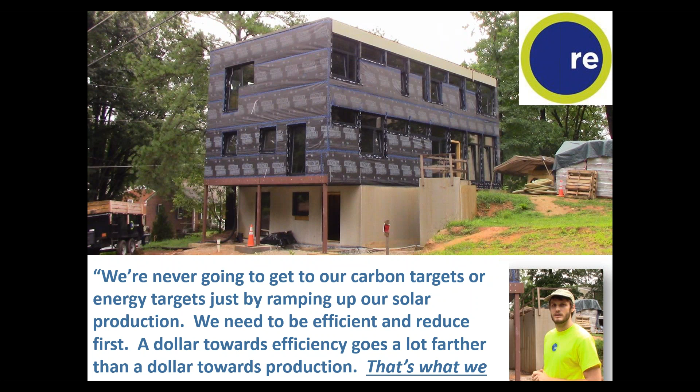Final mention is just a quick thank you to our participants, our panelists today, Steve, Kristina, KG, and Leah. They and others have been participating in our monthly Passivhaus committee meetings that we do. We've been doing this for probably about 1.5 years or so at this point, and every month we get a couple more people to participate and talk about a couple more fun things. They take place on the 2nd Tuesday of every month at 2 p.m. It's usually just an hour-long phone call. It is for members only, but we do invite guests to participate and kind of learn about what we're doing, and then hopefully encourage you to join the association. But again, that's up on our website under the directories. There's a committee for Passivhaus, and then there's also an events calendar, and you can find that information there.

So without further ado, I'll do a very quick introduction of each one of our panelists, and then we're going to kick it over to Steve, who is an NCBPA board member, to start the presentation. So we will have Steve Schreiner. He is with Schreiner Design out of the Lake Norman, Charlotte area, certified Passivhaus expert extraordinaire, and he will be talking about residential single-family projects, and so he'll be kind of getting us started with some background on Passivhaus for folks that are a little unfamiliar.

Next up will be Kristina. She is an architect over at OnSite Architects in Charlotte, and she works on lots of different types of buildings, and so generally speaking, we'll call that commercial today, and she'll have a case study that she'll be presenting. Also on deck is KG, as his friends call him, with BuildSmart out of Lawrence, Kansas.

He's got quite a bit of work here in North Carolina, and they are a product manufacturer with panelized wall systems, and he will be focusing on multifamily projects today. So thank you, KG, for joining us.

And last but not least, I have a typo. I'm so sorry, Leah. I will fix that right now.

Leah Dickens with Deltec Homes. Deltec is based in Asheville, North Carolina. Traditionally, they build those really cool, hyper energy efficient roundhouses that folks are familiar with, but Leah will be talking about some of their newer work with zero energy ready homes, and specifically how you can go from Passivhaus, mostly

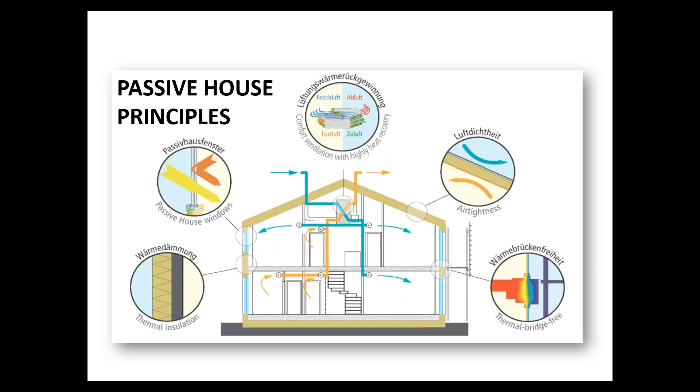Starting with the building envelope, I like to compare it to basically the leaky bucket syndrome, where think of you're trying to fill a bucket full of holes and you just continually have to keep the water flowing to basically equate to the water that's escaping. And that's about the same scenario if you think about it with a leaking building envelope.

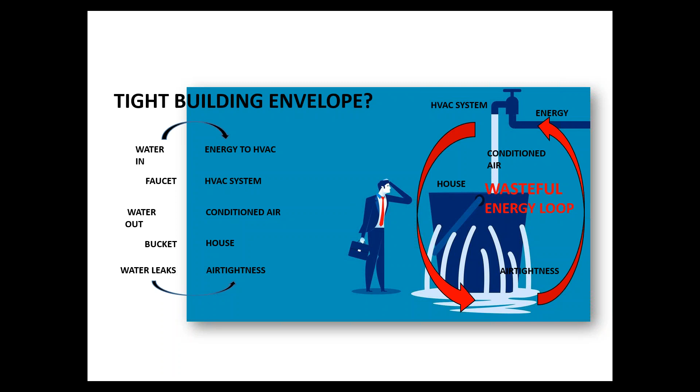What would normally happen in a conventional construction, you have infiltration, exfiltration, and that air needs to be continually reconditioned, which takes energy to do that. And that's the wasteful energy loop I show in that cartoon.

I borrowed these slides off of Megan McDermott with High Performance Building Solutions, and she shows here in a chart 4 building programs, starting with 2018 International Energy Conservation Code. They have a 5 air change per hour at 50 pascals air tightness requirement.

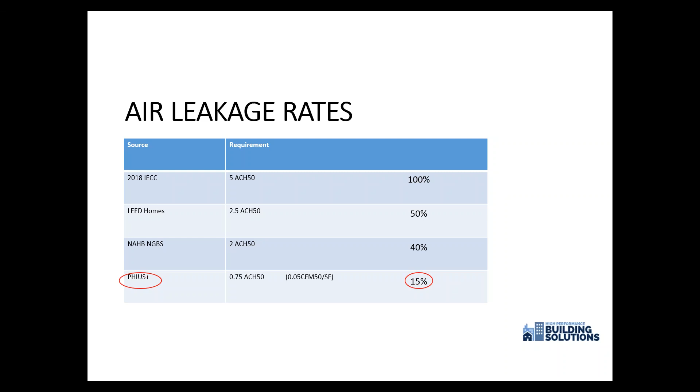You see LEED for homes, the NAHB's National Green Building Standard, and then at the bottom, PHIUS, or Passive House Institute US, and they have a 0.75 air changes per hour, and that is a 0 before the decimal point. And so that's showing only a 15% leakage rate compared to the IECC.

This is a printout that I did of an optimization software that I use called BEopt, National Renewable Energy Labs. And it's a software that allows you to compare different building assemblies and the components and different combinations of them to find the most energy savings, which would be the x-axis in this graph, as compared to energy costs, which would be the y-axis.

So what I'm showing here is an optimization curve, and anything on those curves are the most optimized or cost-efficient and high-performing combinations of building components. The red I'm showing you, as you tighten up a building envelope, it gets much more energy efficient. And basically for every 2 air changes per hour that you tighten up, you're going to see somewhere between an 8 and a 10% increase in energy savings.

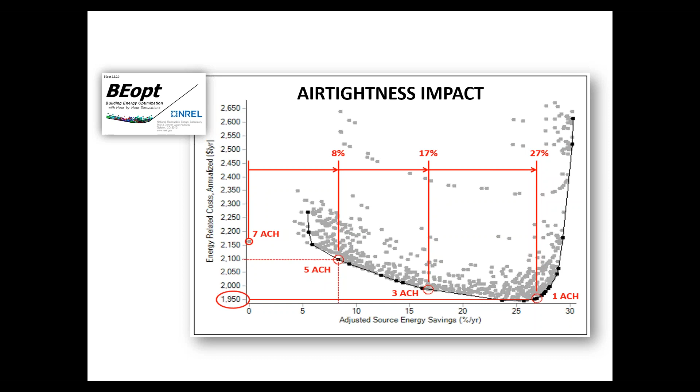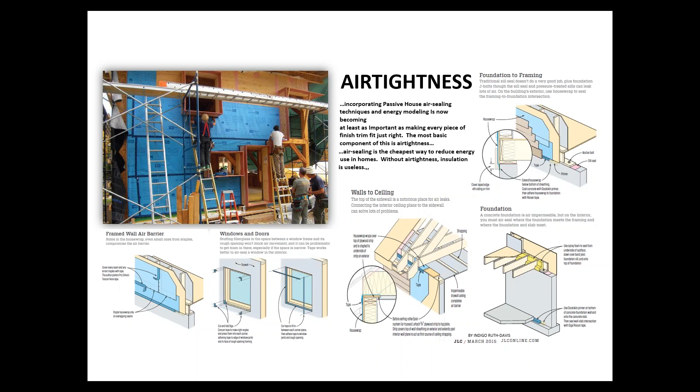Of course, there's all kinds of ways of addressing air tightness in the building envelope: your house wrap and taping that, your window installation and how well you seal that in the rough openings, raised heel trusses to allow you better sealing and insulation possibilities at the upper wall and roof juncture, and of course sealing and insulating the rim joists, as well as using different materials and methods of air sealing.

There are pre-manufactured sheathing systems that have air and water resistant barrier already applied, coatings applied to the outside of the sheathing, and in some cases there are some insulating characteristics of that sheathing, providing you an R sheathing, if you will. There are fluid applied applications as well. Usually that's more towards a multifamily or commercial type setting, and there's an airborne chemical that is sprayed under pressure inside the building envelope, looking for cracks and crevices that air is trying to escape from the inside to the out.

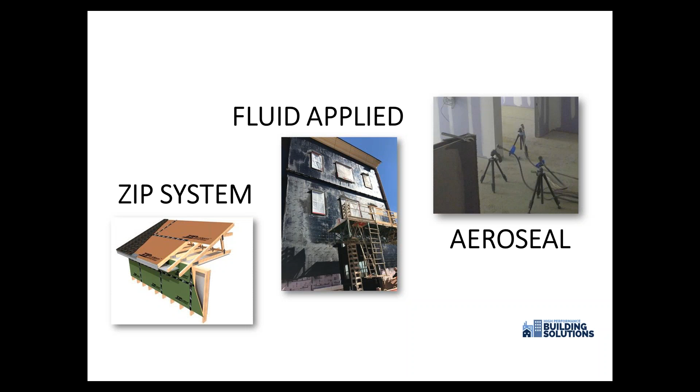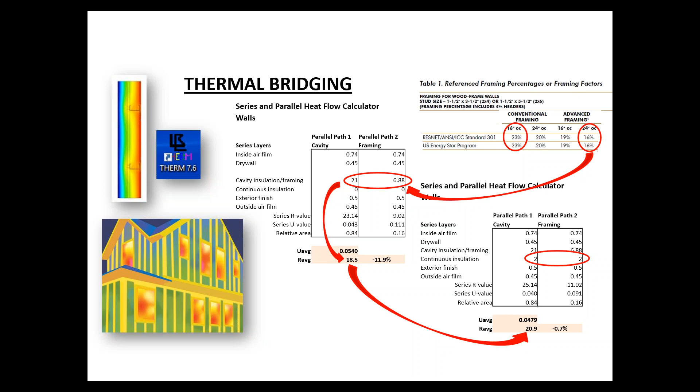It's really an 18.5, or a 12% decrease, because of the thermal bridging by the wood studs. The right lower corner shows that same table, but if I add about a ½ inch of EPS to the outside as continuous exterior insulation, I'm able to break that thermal bridge provided by the wood studs, and it gets me back up to a full wall rating of 21. So again, it's a little bit of a trade-off back and forth of how you can handle thermal bridging.

and it gets the entire T-stud up to an R20 rating, which, if you remember the previous slide, we were at R21 fiberglass cavity. This is going to get the stud to equal the cavity. Well, this may be another way to break that thermal bridging situation without having to do the exterior continuous insulation. So again, this is to some of the flexibility the Passivhaus program has.

Okay, this table I wanted to point out, again, another example of thermal bridging, and this is one that really even surprised me. As I mentioned earlier, the thermal envelope also includes a bottom. In this case, it's the slab. And the circle in the middle, those two assemblies are exactly the same except for one very important fact, and that is one has 2 inches of foam under the slab, the other does not.

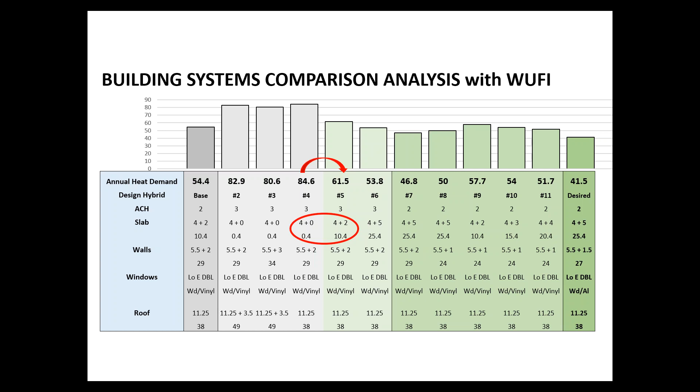If you look at the annual heating demand above, you're going to see a 23-point difference. That is huge. So even here in Charlotte, in a relatively mild climate, the slab to earth connection still provides a pretty good thermal bridge that you might want to consider.

As I had mentioned about windows earlier having to do their fair share, I borrowed this slide off of Alan Ockoff with Andersen Windows. The Lawrence Berkeley National Labs, together with Andersen Windows and Alpen High Performance Systems, is doing research to develop a triple pane window that will have the characteristics of a double pane window with regards to width and weight. The trouble with triple pane windows normally is they're usually wider frames and they are much heavier, which makes it a little more challenging to incorporate in conventional building systems.

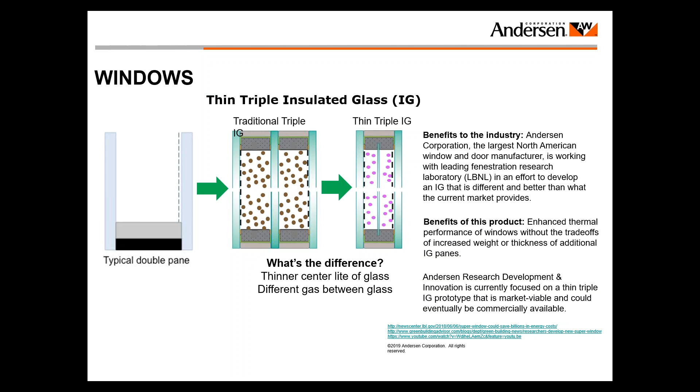So what they're doing is using a flat screen TV glass, which is extremely thin and thereby very light as well. They're going to come up with a triple pane window that will be basically the same width of a double pane and weigh just about the same as well. This is in research, and they're hoping to have it to production in the next 2 years. And this would be an extremely important game changer for Passivhaus.

Okay, let's turn to the inside and the mechanicals. This cartoon cracks me up. It's probably the best description of Passivhaus that I know. The far left, a couple hundred years ago, we started building structures for ourselves for comfort and safety, and we added fireboxes inside for a little bit of additional comfort. The middle sketch shows we thought we'd get smart in the 20th century and start adding a bunch of mechanicals, maybe improving the outer structure, okay, but maybe not as much as we should. But all those mechanicals take energy to run them.

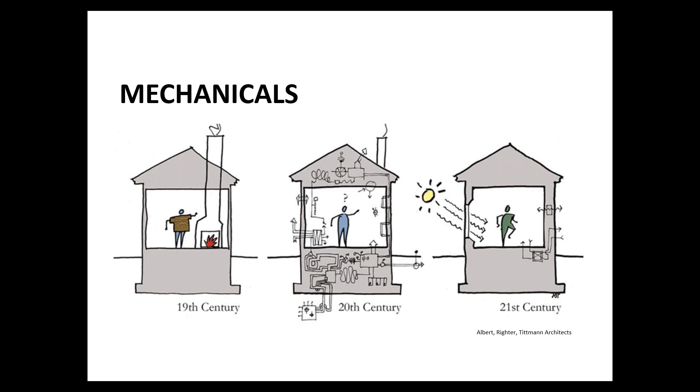The one on the far right is basically what Passivhaus does. We look at the structure and the envelope first and foremost to get it to the optimum performance, if you will, and then we supplement it with a minute amount of mechanicals inside, thereby greatly decreasing the amount of energy to run it all.

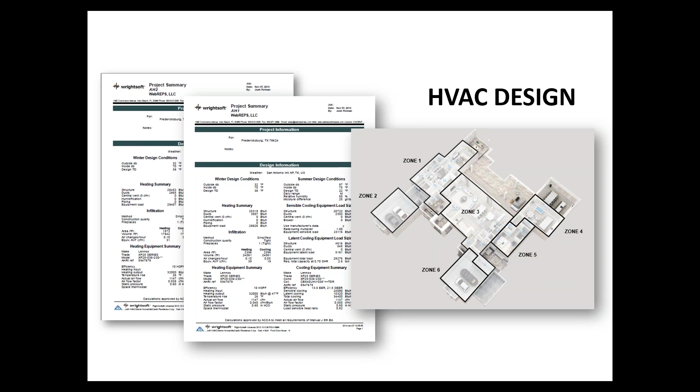Of course, as you tighten things up, you have to be very careful with the HVAC design, and that's when we have to implement the ACCA Manual J, S and D, to make sure everything is sized properly and will perform. What we have to be very careful with in these airtight buildings is not only the sensible loads, but even more so the latent loads that normal construction doesn't have to worry about. But that's something that we take a good hard look at in Passivhaus design.

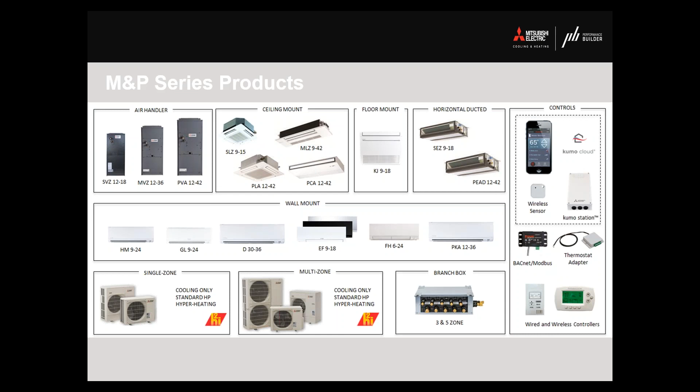I borrowed a series of slides from Rob Howard over at Mitsubishi. This is to show you a myriad of products they have that will address the tight building envelope environment that a Passivhaus will cause. These are showing air source heat pumps, both ducted and ductless mini splits. I will tell you that as we get tighter, using combustibles, for instance gas heating furnaces and gas water heaters, is probably not a really good idea because of backdrafting. So the heat pump and electric heat pump related products shown in this slide are probably the way to go.

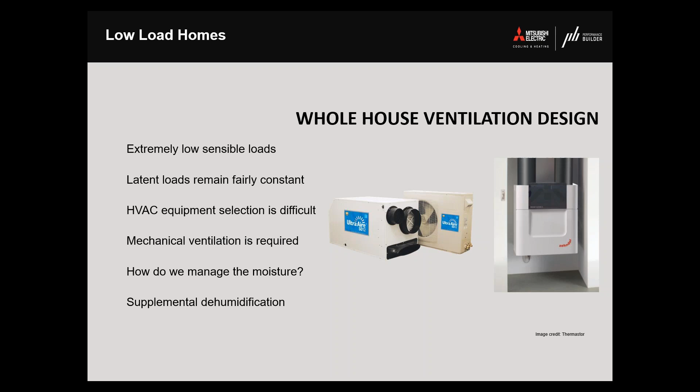As I mentioned earlier too, ventilation becomes very important. We do not have the easy airflow of a drafty conventional construction. We have controlled import and export air. We want to make sure that the new fresh air we're bringing in is pre-treated with the energy of the already conditioned air being exhausted. It is a dedicated system that supplies air to the bedrooms and living areas and exhausts air from the wet areas and odor areas such as kitchens and bathrooms. And I'm showing in the photograph here a couple of ERVs, or energy recovery ventilators, that are used for that process.

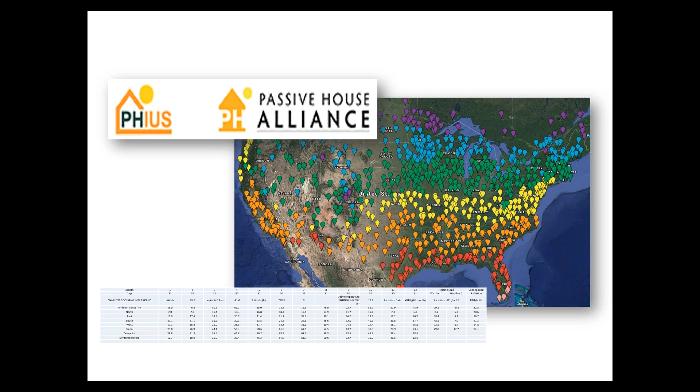What I like about the PHIUS Passive House program is that it is not a one-size-fits-all program. It is very site-specific and climate-specific. Each of the balloons shown on that map of North America shows the locations that PHIUS has analyzed using WUFI and BEopt to get an output of targets that are optimized for the location and the climate at that location. The chart in the lower portion of that slide shows the climate data that would be inputted into the WUFI energy model together with your building assemblies to give you a very effective output for your different heating and cooling demands.

As with any process, there is a right time to do things. I would advise that the analysis part be taken into account during conceptual design before you get to construction documents. With the different scenarios that I presented to you earlier in the presentation, what you would do is enter those different assemblies and components into the WUFI and BEopt software to help you make decisions on what best works for your building systems or your particular design and the targets that you're trying to satisfy.

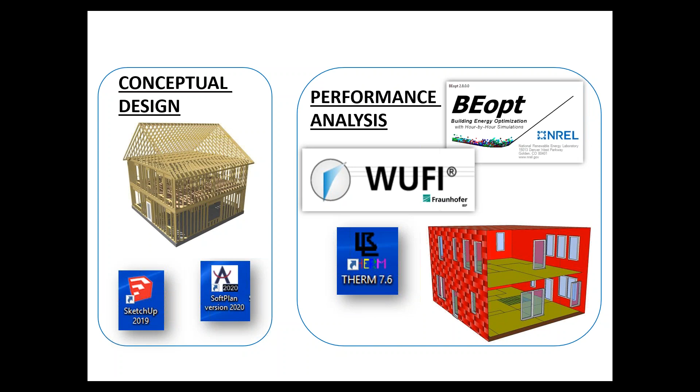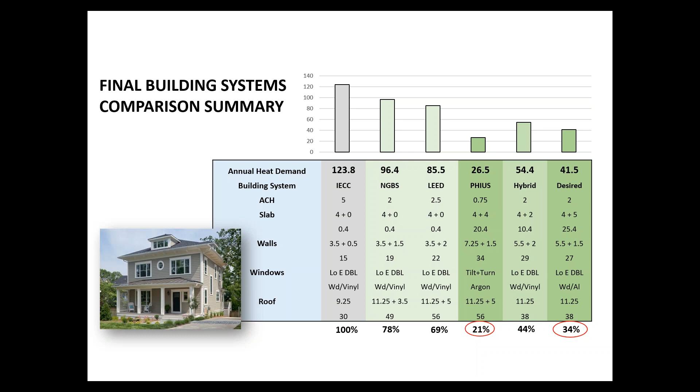One last chart. This is showing four building programs and how they perform against each other depending on the building components that they're specifying, all the way from IECC, Green Building Standard, LEED, PHIUS. What I've done on the far right is come up with a design hybrid that I use as a kind of test case. It's 2 air changes per hour, 2x6 studs, an R27 wall assembly. And it does have foam under the slab for about R25 and an R38 ceiling. And you can see that it will produce a heating demand that's 34% of what the IECC components would. So again, this is an example of what the Passive House program can do to make a building really sing. And you can see the PHIUS column in the middle there. They're 13 percentage points below me even.

Recently, there have been articles about this program in Builder Magazine, which is the NAHB's publication. You might want to check that out. I think it was the January issue that they had the article in.

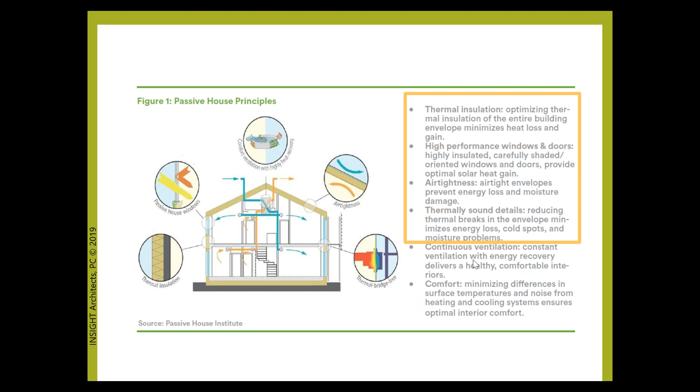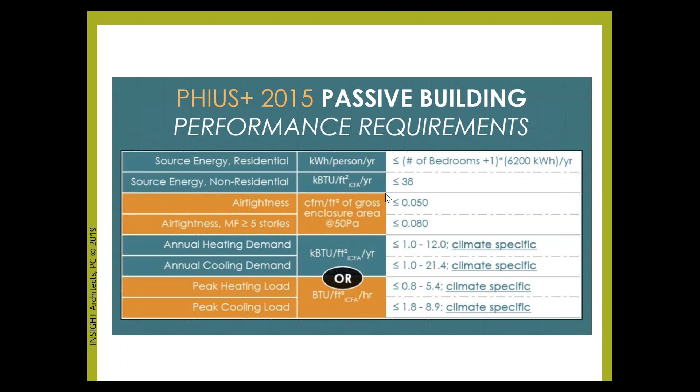Here are some other prescriptive requirements, and the one for pre-certification and on-site verification is something I appreciate most for Passivhaus. Pre-certification gives you a chance to have a peer review with PHIUS, and they will point out any troublesome spots and areas in your envelope. Once this passes and you correct any issues you might have had, and the building actually is under construction, you will get on-site verification, and you will get one for foundations, when the building air envelope is on with the windows to test for air tightness before the facade is on, so you can still regulate and correct mistakes. And then one is the final test for air tightness. So it's completely performance based.

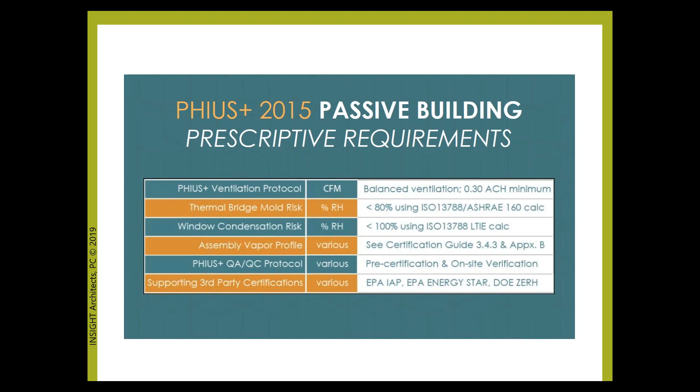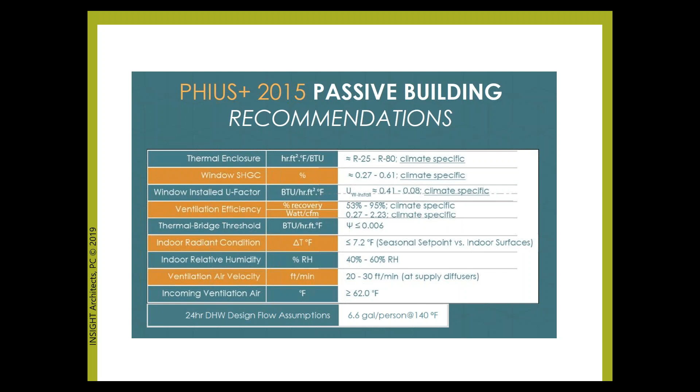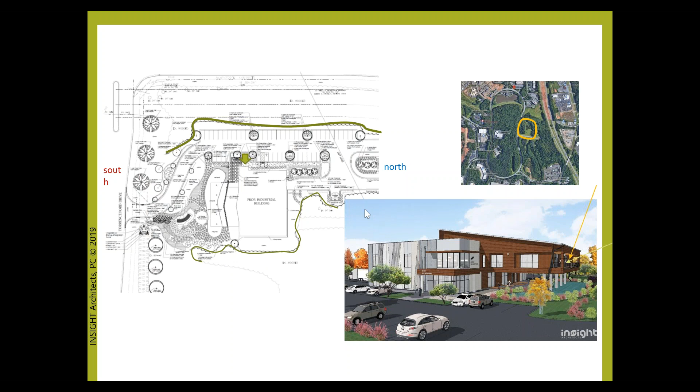Also, this is the industrial part, and this is the office part. So they are separated mechanically into zones. The industrial part has its own mechanical system, and the office portion is divided into zones with VAV boxes. The industrial portion of the building has a different construction type, so the bearing exterior walls are actually insulated precast panels, whereas the upper story and the first floor of the office are steel construction with rain screen.

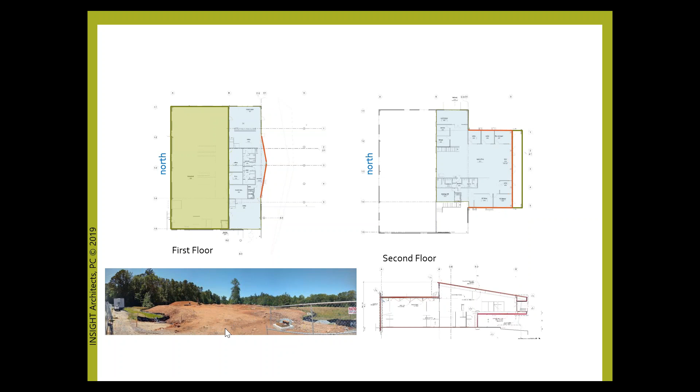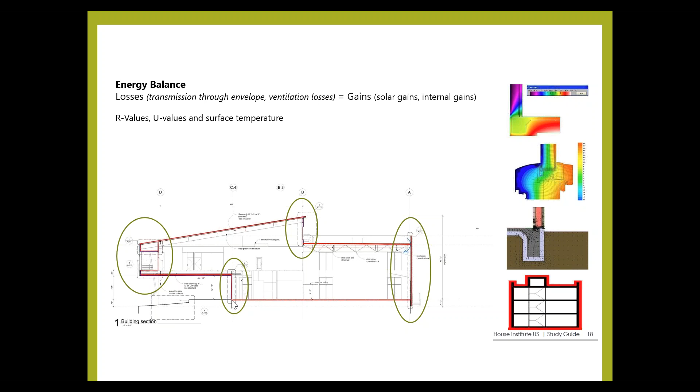So here we have underslab insulation, and that connects with our continuous insulation in the precast panels, connects with continuous rigid insulation in the roof, and then connects with cavity and continuous insulation in our wall system. Again, it goes around the penetrations of the structure through the envelope, out and around, and connects again to the footing. So I'll try to show that a little bit better in larger details.

So this is our south-facing second-story porch. And since we have steel penetrating the exterior envelope, what we did is we actually ran the thermal insulation all around it. In Europe, you can actually make connections that are thermally broken steel to steel, but we don't have them here yet in the United States. So this is what we did. We had to run it all the way through. We were going to do it as well in the bottom part, but for some reasons we have not.

So the door actually sits on a piece of rigid insulation that then connects to the insulation below deck. So we have a small thermal bridge right here where the steel beam actually disconnects our batting and rigid insulation. But otherwise, we have a continuous air barrier, which is very important for us in the south, so we don't lose any energy in the summer months when we are air conditioning the building.

So then the next detail is the footing and the wall, and you have continuous underslab insulation, around the footing and up into continuous insulation. So we have a rain screen on the office part, which means that our cladding allows for water and wind to reach the weather barrier.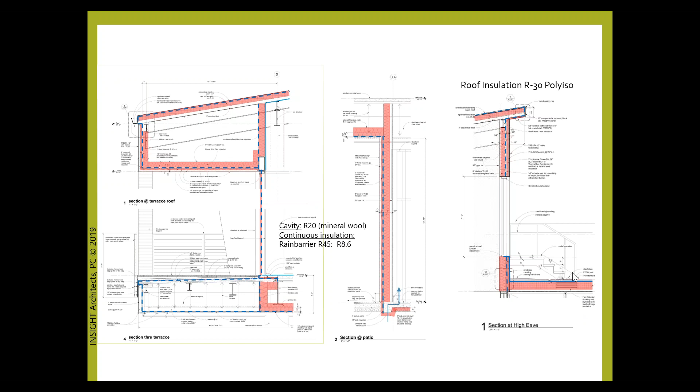So here we have an exterior stair, which allows us to access the roof. So we don't have a roof hatch. We have actually a storefront with a door where you can more easily walk out on the roof for maintenance. And what we did is actually set the stair on top of the water barrier and the thermal insulation, not to have any thermal bridge here. So I thought that was an interesting detail to show, and just to sort of explain the thinking behind these types of buildings.

And then here, as another interesting thing we found, is the energy guard. Because we have a dock door here, it's an industrial building. They leak air terribly. And first, the idea was not to condition the industrial part, but since the work that is being performed is more programming than manufacturing, really, the comfort level of the workers was really important.

So for one, what we did is we sliced the building with a storefront. So while you're at the factory, you can have views to the outside and you can have a lot of daylight. Daylight studies show that you don't have to even turn on the light on a nice and sunny day. So at the dock door, we would have a lot of air leakage here. So what we did is we used the energy guard, so when it's closed, you don't have any air leakage through the dock door.

Here is the precast panel with the 2-inch continuous rigid insulation. So from the PHIUS Institute, they have done studies that thermal mass in combination with the continuous insulation will jack up the R value of this continuous insulation by 2. So this wall as well has about a 28 R value. So has every wall. Here we have another continuous insulation on the factory with EIFS, which is a self-draining EIFS system. So it will prevent any thermal bridging from the metal studs in the wall. And then again, mineral wool in between the studs.

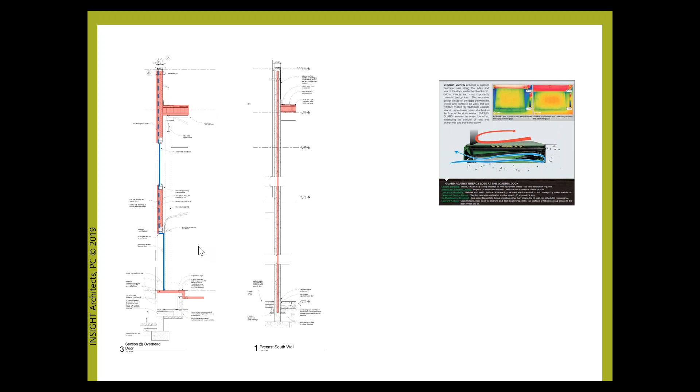Then we come to the windows. And one type of window we really like to use in passive house is the tilt and turn. And this is because, well, it looks nice and we are used to using it in Europe, but also because it actually air seals the window much better than a double hung, because it applies pressure on the gasket and no air can pass through. Another thing that we usually do is provide these windows for ventilation almost solely, and the rest of the window is fixed. This reduces cost and also improves air leakage and also R value for the window.

So here on the west side, what we did is we pushed the window in a little bit in a rhythm, so you can get some shading from the wall as well. And here is a typical passive window that is even 4-layered, which is really a lot. Here for our climate, a 2-layered window is just enough if we have the right solar heat gain coefficient and U value. So here is the chart.

That's the PHIUS chart, the recommendations, and then you still have to do your energy model to see if everything pans out and to find the sweet spot on how much money you're going to invest in the envelope and windows and how much energy you're going to save. And at one point, adding more R value to the envelope really doesn't give you anything, so just to see where that trade-off is.

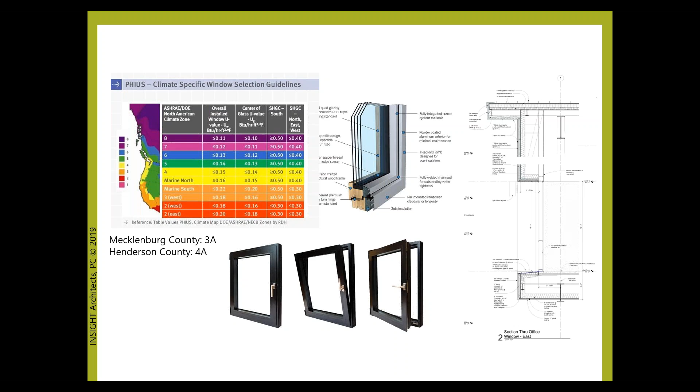So it's very commonly available materials. And then exterior gypsum sheathing for our exterior air barrier, and basically gypsum was our interior air barrier.

So here's another project where we went a little bit more extravagant, if you want. So we actually have a rain screen that is attached to a 2-inch wood fiber board. This wood fiber board is called Gutex, and it's a new product. It's made out of wood chips, really, that are then infused into paraffin. So it serves as an air barrier and as a weather barrier. It overlaps with the tongue and groove, so nothing can get through it, but yet it breathes.

So we have 2 inches of this. This is in a different climate, 4A, up in Asheville. So we have a better R value for this wall. It's still metal studs, and we use an interior membrane, which is called Intello. And what this intelligent membrane does is it can open up in the direction of vapor travel.

So in winter, when we have a lot of heat in the house and we accumulate a lot of moisture, the moisture wants to escape. So the membrane actually closes and doesn't let the moisture go into the wall, where it could potentially condensate and create mold. And in the summer, when we have a high humidity on the outside, the moisture will actually pass through and you can dry it out from the inside, which is what you want.

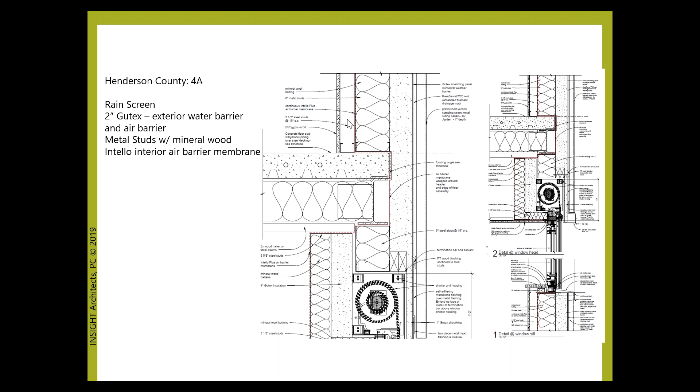You know, when you hang a picture in the wall and your chipboard is the only interior air barrier, what happens is really you create air leakage through electrical outlets, through pictures hung on the wall, and so on. So here you actually create an electrical chase that doesn't allow for this continuous air barrier to ever be broken.

Hey, Kristina, it's Ryan. We're getting some background noise. Is that from your side? Yeah, let me. All right, folks, I think Kristina's probably running to another room, maybe. Sorry about the background noise there. I'll give her just a minute. Hello, Ryan, can you hear me? I'm back. Is it better now? Yes, thank you, Kristina. Yes, we have an open office, so everything is just acoustically not separated.

But here's the Intello membrane. This is what it looks like. It's really easy to apply. And this is the interior air barrier you see, and then the Mento air barrier on the exterior of the building. Taping around this connection between the window and the air barrier is also very important, and taping in between the sheets. There's also some overlap in them, and they're just installed in a very specific way.

So what is the difference between the two? The Mento membranes and Intello membranes actually work on a molecular level versus on microperforations. So the microperforated membranes, once they tear, they actually don't work that well anymore. These are much stronger, and they don't allow any air to pass through, just vapor, which is exactly what you want.

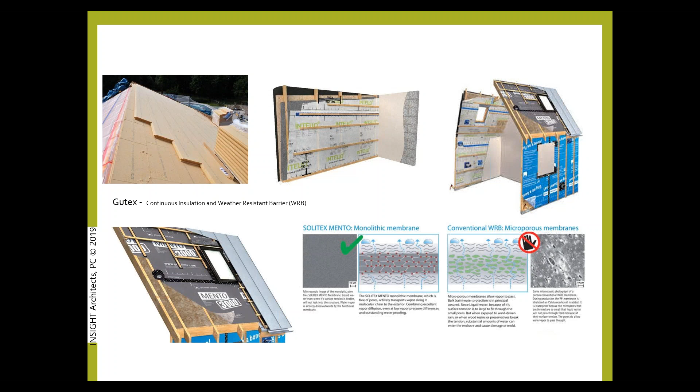They're also a little bit expensive, but on a project that was, for example, $1.8 million, all of the membranes turned out to be $40,000 just as a wrapper. I think it would be totally worth it to completely seal your building for that percentage of a project cost. And here's another one.

Sorry. So why is it important to certify with Passivhaus? It is great to use all the principles and just be mindful of how you build the building and build a more high quality building. But when you actually go for certification, it isn't that much more expensive, but you get a lot of benefit for it. You get team commitment and client commitment. With pre-certification, you get the peer review of your drawings. So you actually send in your drawings and you can learn from them.

You can make them better and almost perfect. Then when you go into the energy modeling, you can actually fine-tune all of these things and balance cost versus what you're actually getting with making this super insulated structure.

You get field inspections with it. So they look at how you are actually insulating under the slab. You get another field inspection to see how you air sealed your building, where you can check for leaks and correct them. And then in the end, you do the final blower door test where you actually show that your building meets the Passivhaus airtightness standards.

So I really like this system because it's very straightforward. It gives you enormous flexibility with the type of building materials you're going to use, the technology you're going to use. So you can go very basic and buy all of your materials from Lowe's, or you can go high-tech and use high-tech membranes and high-tech heating and cooling equipment. And you can do anything in between. So it's a very simple and applicable, practical way of building, and it's very resilient against power outage, and the thermal envelope lasts much longer, and that's something you'll have for the longevity of the building.

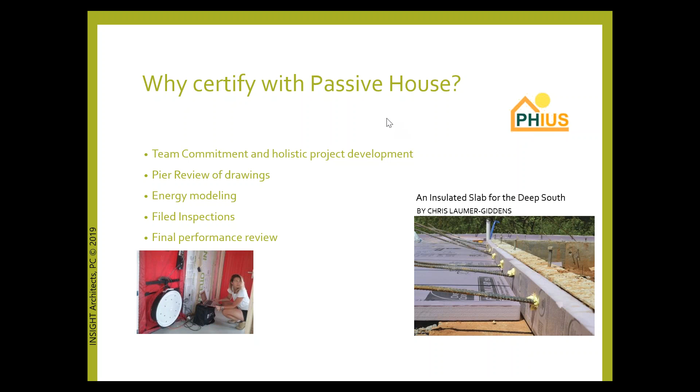My name is Karan Gupta, or KG for short. I'm a project manager at BuildSmart, and we're a manufacturer of high-performance panelized wall systems based in Lawrence, Kansas. Today, I'm going to be discussing panelized passive house systems for new multifamily construction. I have adapted this presentation from my colleague, Paul Grahovac, who has a compelling financial analysis paper to complement it.

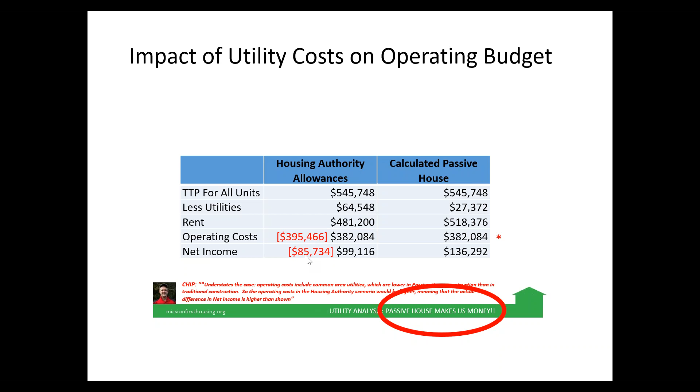So what's shown in black here is they put in the same operating cost for what it actually was, but if you were to properly value the operating cost for the common areas, it would actually be higher, and therefore the net income would have been less for a code built.

So the increased net income for the passive house building increases the developer's borrowing capacity by $300,000, and the increased mortgage amount translates directly to a higher net fee for the developer. Because the developer for this project is a nonprofit, they can plow the increased fees directly back into building more affordable housing.

So the Whitehall project in the case study we just looked at was affordable housing. But how do the numbers compare when you're looking at market rate housing? Well, Paul undertook the task of a financial analysis for the same building if it were built to code in Kansas City and if it were built to passive house without any subsidies. As you'll see in a moment, the results are promising, but when comparing new passive house construction to legacy housing stock rather than to new construction to 2012 code, the numbers are even better.

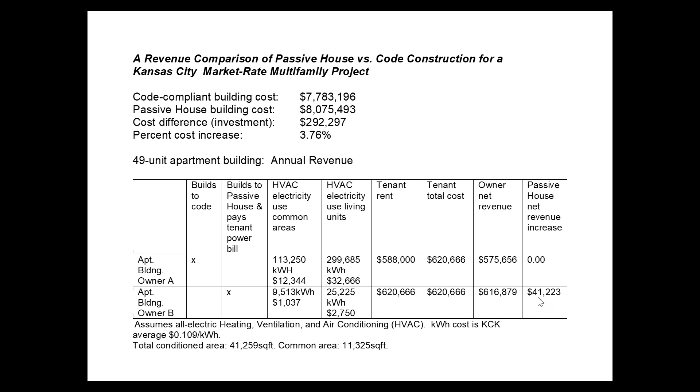So in the chart shown here, owner A owns a building just like the Whitehall in Kansas City, built to the 2012 code. Owner B owns a similar building, but this one would be built to passive house in Kansas City. You can see there's a 3.76 cost premium for the passive house building. Owner A pays the utility bills for the common areas, and the tenants pay utilities for the living units, whereas owner B charges tenant utility allowance and pays all the utilities. And you can see a net revenue increase of $41,223 for owner B.

I know there's a lot of numbers there. I'll try to walk you through them slowly. Don't worry about the numbers down to the single dollar digit numbers. But let me just walk you through this table. In the base case, the net annual cash flow is the difference between the additional revenue from the energy savings and the additional cost of the mortgage payment attributable to passive house construction.

With this net annual cash flow, it would take 10 years and 9 months to achieve payback on the cost premium. But as we work across this table to the right and factor in additional savings from passive house and panelized construction, you'll see the payback start to drop. The first thing we can look at is first cost savings on the HVAC capital expense due to reduced loads for passive house building. After that, you can add in fixed windows with lower maintenance costs and failure risk. So that's basically changing some of the operable windows to fixed.

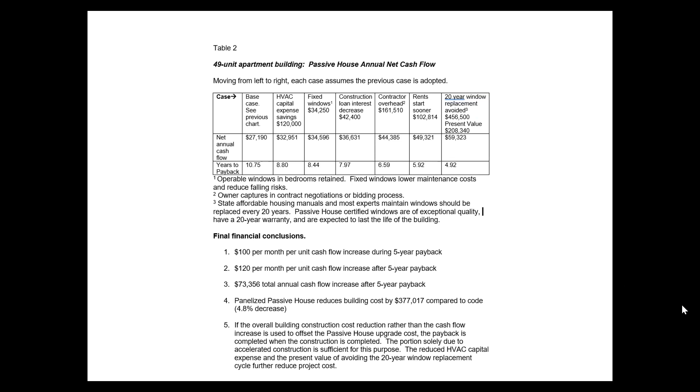The uptake in passive house construction for affordable housing in Pennsylvania supports the conclusions of our case study and financial analyses. And I tried to keep this short, so that gets us to the conclusion.

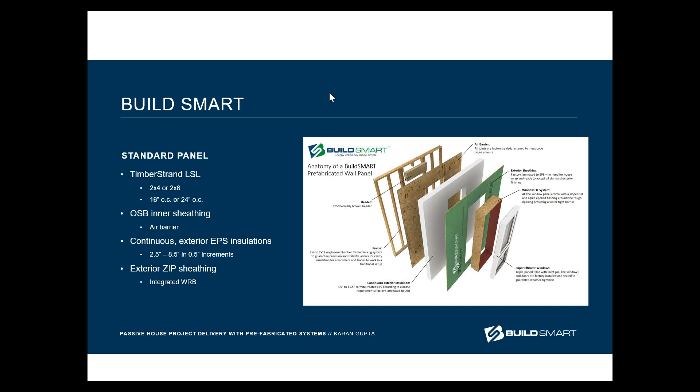All right, so we are going to jump ahead to our last presenter, and the reason she is last is that she can take our homes and buildings down to net zero energy very easily, cost effectively, and whatnot. So Leah, I jest a little bit because I know it's not that simple, but do you want to tell us how to do it for the real world?

Sure. So, hey guys, I am Leah Dickens. I'm the Green Building Manager with Deltec Homes. We are actually sort of like BuildSmart in that we are also a panelized company. Our manufacturing plant is in Asheville, North Carolina, but we focus on single-family residential construction. And so we build our home kits in Asheville and ship them all over the world for people to erect with a builder on site, and we have our own builder in Asheville as well.

And so I work as a building science consultant for our builder, other builders, and for our clients on green building. And we recently built one of our homes to the DOE Zero Energy Ready Home program. So this is not Passive House. I'm actually here to talk about not Passive House. But I wanted to talk about how some of the aspects of this program that maybe look at energy use a little bit differently could be beneficial to a Passive House project. All right, let's go to the next slide.

So a quick overview of this program. It's another third-party certification program. This one is put on by the Department of Energy. And surprise, if you're doing the PHIUS standard, it's a co-requisite, so you should know about it, because you've got to do it as well if you do the Passive House US version of the program. It's the next step above Energy Star, which is another well-known green building program as far as performance. So its target performance level is in the mid to low 50s HERS score, which is certainly respectable performance.

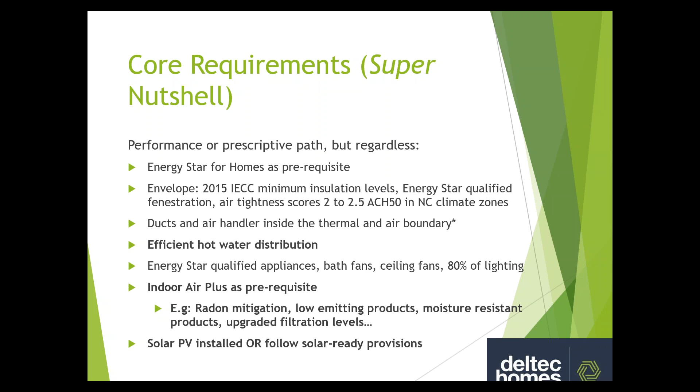And in addition, you've got to either have solar PV or follow a solar ready checklist if the home has enough solar energy to justify, or solar access, like it's not shaded, it's got enough solar energy available.

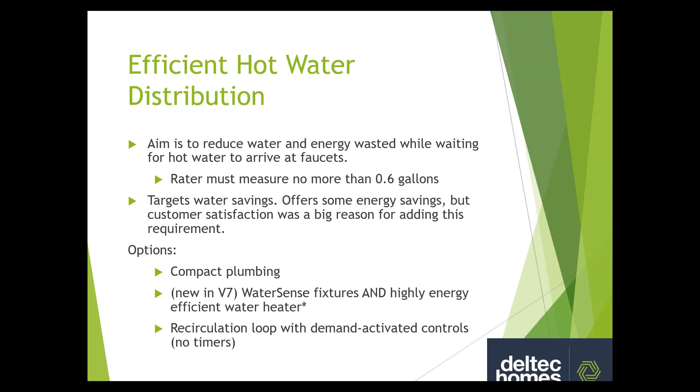So the ways that you can meet this requirement: you can limit the piping distance between the water heater and all the fixtures that use hot water using compact plumbing or a central manifold kind of system. In the newest version of this program, you can also meet this requirement by having WaterSense fixtures at every faucet, plus a very efficient water heater, and there's still some caveats to making that work. Or you can use a hot water recirculation loop with demand activated controls to ensure the energy savings, and that's actually what we did on our project.

What that is, it's basically a typical trunk and branch plumbing system, but it's adding a return loop to bring water back to the water heater. And so you have small branches off of that loop to each fixture. And that pump is what's kind of controlling it. So it's basically bringing the cooled water back to the water heater to get reused instead of having it sent down the drain. The pump basically runs until the water's hot enough and then it shuts off.

So when you're doing this, the way to save energy is to use demand activated controls for the pump. For the Zero Energy Ready Home program, that's got to either be a button that the homeowner activates when they want hot water or an occupancy sensor. And there are some pumps that have adaptive control systems that learn the homeowner's behaviors, and those are okay too. What it can't be is a timer, and that's kind of commonly how these systems are set up.

And I've actually even heard horror stories about how they don't think about controls and they're not controlled at all and they just run all the time. And those systems, they find, end up wasting energy rather than saving it because they come on when the homeowner doesn't actually need them. So the DOE says it's got to be demand activated for this program.

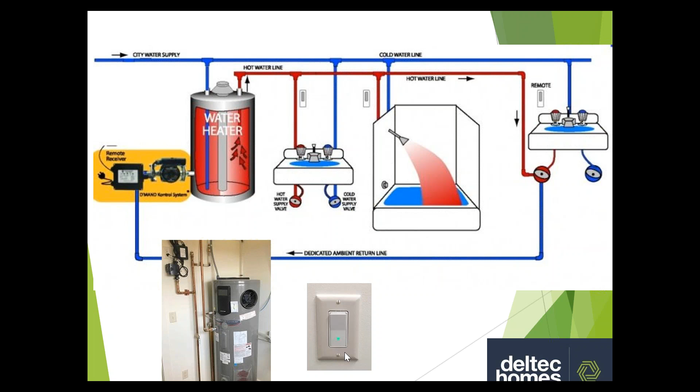So to meet the zero energy ready part of this, one way to do it is to just have solar as part of the project, which is what we did in our example. We had a grid-tied solar array. We used the HERS score to help figure out the size for the home. Basically, we were looking to be in the 0 to 10 HERS range, and we ended up at 0.

In North Carolina, solar is pretty easy to do. If you're on Duke Energy, they do have a one-to-one net metering program where they basically buy back the excess production at the same rate as retail, and then clients can credit that against their future energy use. If you're on an electric cooperative, the story is more mixed. You just kind of have to look into it and see what their programs are. And my real advice is just to have an experienced residential solar contractor work with you on it. There's a lot of them in North Carolina, and it's actually pretty simple.

But if you're not going to do solar as part of the project, but you have enough south-facing roof space for solar that's not shaded, then you do have to do the solar ready checklist for this program. And what that requires is some basic stuff to give to the homeowner to make solar easy. And I think that makes lots of sense for a passive house. So you've got to provide drawings to the homeowner that show them where the solar array is going to go, basically how big it's going to be. And they advise that you can go ahead and put blocking in, if you need to, for the roof or for the inverter to fit the solar panels.

To go ahead and provide structural information that verifies that the roof can support solar. Commonly, when you go to do solar on a retrofit and you get a building permit for it, one thing they ask for is, structurally will it do it? So giving the client that information is helpful. You've got to go ahead and install and label the conduit between the solar array and the inverter, where those things are going to be, and then between the inverter and the electrical panel. And you've got to provide the breaker or the labeled slot for the breaker, a 70 amp dual pole breaker for solar.

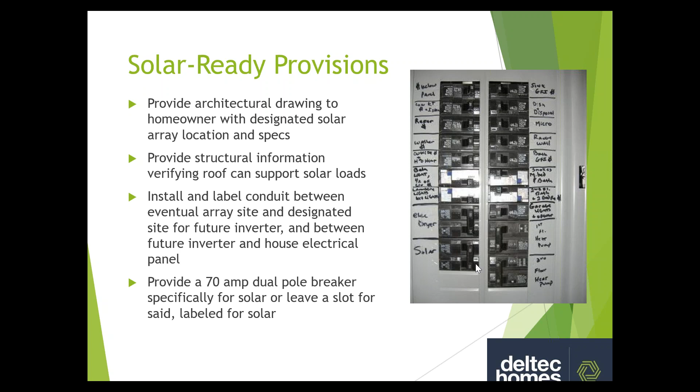All right. So just continuing with this theme of ways to reduce energy that are not necessarily the same concept as passive house. Zero energy ready home doesn't require whole house electrification, but there are a lot of electric appliances that can use a lot less energy, so they're worth looking at. In this project, we actually used a heat pump dryer. That wasn't something I thought of. My client actually researched that and was like, hey, this seems cool. These are neat because they are more efficient than a regular dryer because they're recapturing some of that heat. But that also means they don't have to have a vent. So you're eliminating that one hole in your building envelope.

Induction range is another common, more energy efficient way of providing cooking. It's electric, but it uses magnetism to heat the pot. And it also provides an experience that's a little bit more like gas or propane, but without the indoor air quality problem of a gas or propane open flame. So I've actually been able to convert a number of diehard gas fans to induction. I mentioned that project used a heat pump water heater. I think that's another great idea, depending on your floor plan, if you can get it out of a place where it's going to bother the homeowners. I've heard a common statistic that they use about one third the energy of a typical electric water heater.

That project did use mini split heat pumps as well. I know Steve had talked about those earlier. I think that's a good idea in North Carolina just because you're probably going to be using a heat pump and AC anyway. That's a pretty efficient way to go. So that's an electric way of doing all that very efficiently, especially if you're doing a passive house where your heating and cooling loads are probably going to be so low that most other types of heat pump systems are probably going to be oversized. But there is definitely some complication with how you design and distribute them to not oversize them, but also distribute the heated and cooled air to different rooms. So I think the general strategy that you can accomplish when you combine reducing your energy load in other ways with passive house is that the energy loads of that home are so low.

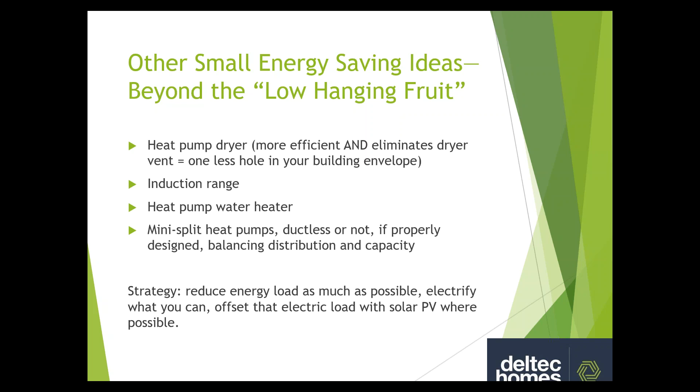You've done it through passive means, and then you pick smart technology choices to reduce the energy load even further. It becomes really easy to offset that load with solar PV where possible, and that's really the goal, to reduce the energy demand of buildings in North Carolina.

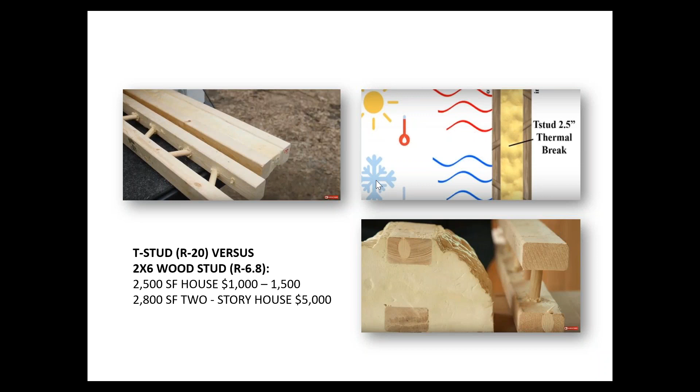Okay, I don't see any other questions in the chat box, so I think we'll consider today's webinar done. So thank you, everybody. Thank you, presenters, for sticking around and providing all this great information. Hopefully folks got what they needed out of this one, and we will, of course, be doing some more webinars in the near future on building envelope, kind of the sealing and membrane side of things. We've got a little bit of information developing on that. Cybersecurity is coming up. That's kind of a new one for us. And then a couple of other topics as well. So we'll be sending those out to folks via email soon.